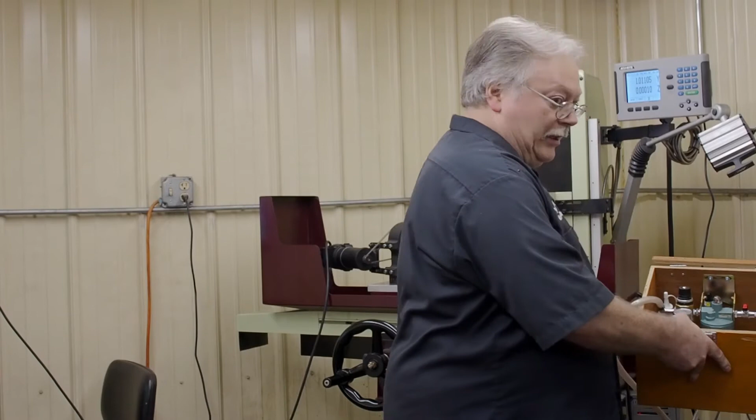The Planet 600, if you're interested in that, will come in a box like this, and in this box you're going to have an air filter, and you're going to have an oiler, and that oiler has to be a special unit because it needs to atomize the oil. If you're running straight oils like in a pencil grinder, the bearings won't work as efficiently. So if it's atomized, it works pretty nice. This is set between 20 and 30 drops of oil, but the way they got it set up, only a portion of that is going through there.

So if you bought the Planet 600 and you get the box, it'll come with an 1/8 inch collet and a 1/4 inch collet. It'll come with the regulators, all the tools you need. I believe there should be some stones, all the different things, the hoses. The nice thing is on their exhaust they got a little muffler system over here, so it's not that loud. I believe that will be close to $3,200 for everything.

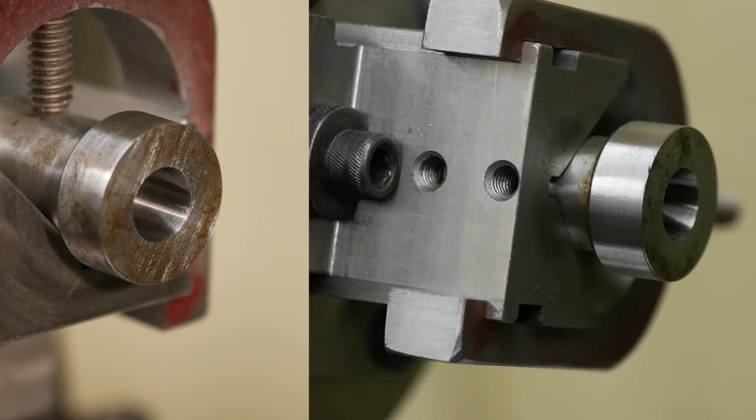And for what it can do, in my opinion, it's quite a bargain. And as you can see, what we have done over here, we did ID grinding. We did this OD grinding, and we're going to show some pictures of this. On the OD, because my wheel's quite a bit smaller than this, and it was very loaded up, I have a little bit of chatter on that, but you can work that out.

Other thing that's nice about this setup, if you really wanted to do it, and the way we have done it in the past as a business, we would get a lot of our work, we would set up and we would grind the OD on the surface grinder with our unit facing this way, and we just do the OD work with a big 8-inch wheel and get the best finish that we can.

And what we would do for anything that needed ID work, later on we would turn the unit, pull the guards off, set everything up, and then we'd re-indicate in the fixture off the face and then off the diameter and grind the ID concentric to the OD.

So we would save our ID work so that we would have, you know, maybe a day or two of work at a time on that, because it will take approximately, when you get good at it, 15 to 20 minutes to take the wheel and the guard off and get this unit up. And I got this set right now where you can indicate down on the bottom here and indicate across here, and it'll line up really well.

But it'll take about 15 to 20 minutes, so you don't want to do that if you have, say, a dozen of these. You're going to be adding 20 minutes to a part. So grind the ODs off first, flip it around, change it over to ID, re-indicate it up, and if you get good at that, you can indicate them in quite fast, and then you can grind the IDs. But it's a nice, easy way.

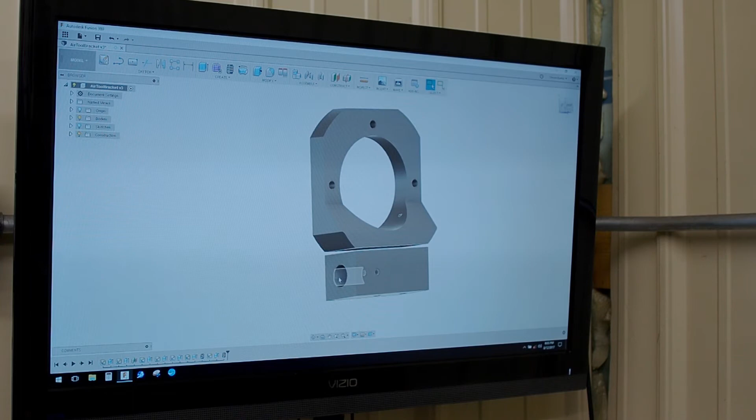But if you look at the hole that's over here, you can see what I got going on. I actually have 2 holes in here. What will happen a lot of times if you have just a round hole and you're taking a shaft, this is just slightly under 3/4 of an inch, about 2 or 3 tenths.

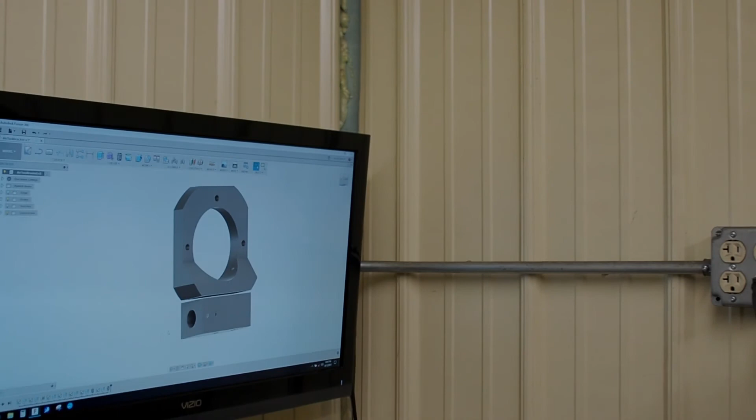Let's just say if your hole is .750 right on the money and that shaft is .750 on the money, you cannot put that .750 diameter into a .750 diameter hole. They're sized the same. So the shaft has to be a few ten-thousandths smaller in order to fit into that hole. And so what I did, I bored this hole out just as close as I could get it.

Now what will happen is if you have that hole even perfect, it's still a tenth or two small. What happens when you put a screw in over here and in the back and you tighten down, and if this was a perfectly round hole, you have 2 points of contact.

You have one point of contact on the tangency on the back side of where the screw is going to be pointing or putting pressure, and you're going to have where the screws actually put pressure on the front side. So you have two round circles, one is a few tenths smaller than another, you end up with two pressure points, and so what can happen, you're going to lose some rigidity in there.

And a lot of times if you're running a lathe with boring bars, you'll find that you'll get this. You think, why, this bar fits so good, I got it tightened down, but I get chatter. I can't stick my boring bar out, I can't get anything. A lot of it is because you got a 2-point contact and it's not holding this solid.

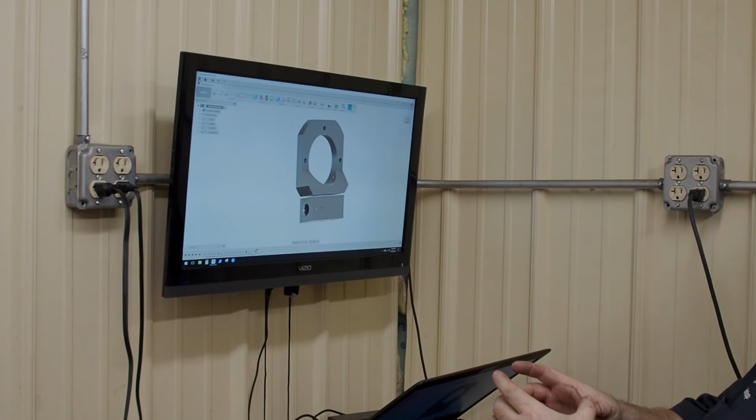So what you can do over here, once I bored this hole out, got it to the size I needed, I backed the boring head down 10 thousandths, and then I moved it over in that direction 7 thousandths, and so it's taken about 2 thousandths off, but you can see what it's doing. This is all clearance that's highlighted there. It's giving me a tangent line here and a tangent line here, so now I have a 3-point contact, and things are a whole lot more rigid.

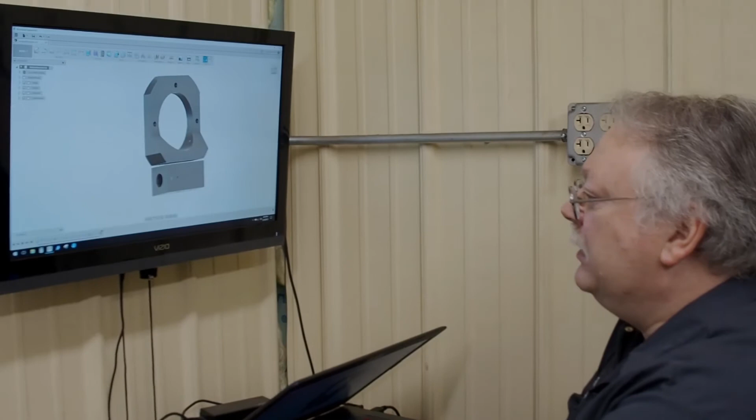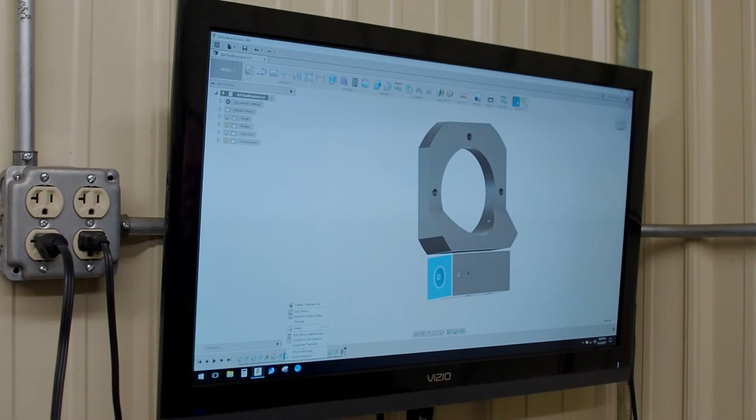And let me see if I can find a sketch on that, and I can show it to you a little bit more. Let's see, which one should I have these named off? Yeah, I think it might be that one. So here's what you can see. I went 750. Of course, I'm about 3/10 smaller than what I bored it to, but I just drew it out at 750. That's what this diameter right here is. This diameter is 750. This diameter right here, this little piece, is at 740.

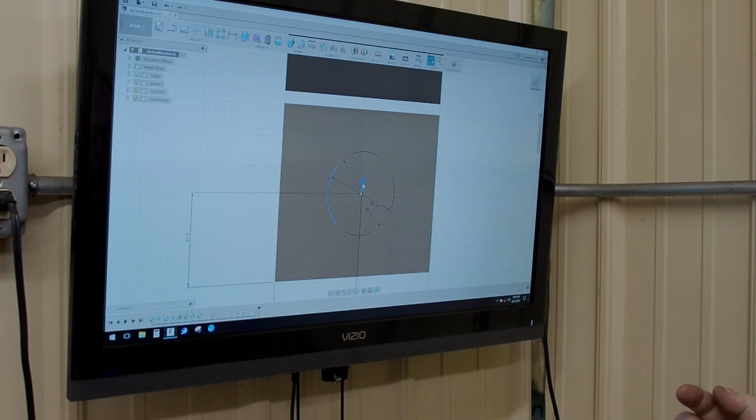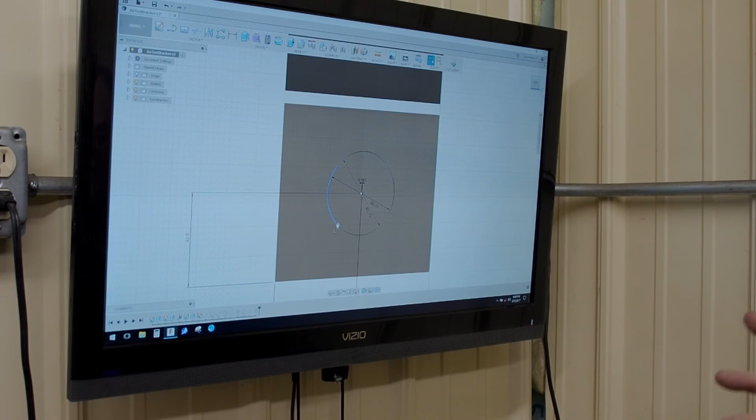So what happens is I backed the boring bar off 10 thousandths, and then I moved in that direction 7 thousandths. And so what it does is this is all clearance right now, all that you see in the blue. So now I got my screws pushing over here, and at that point, that's where the shaft is making contact. Now I got a nice rigid 3-point contact system. And if you do this with your boring bar holders and different tool holders where you have chatter problems, you'll be surprised at how much better that will work out for you.

So anyways, this is the project that we've been excited about, that we've been wanting to show for quite some time. I haven't seen anybody else use a system like this. Maybe they have, I just haven't seen it. I looked all over YouTube. About 20 years ago, we've done this at a different company that I was a part of. We used this for years, done excellent work. You wouldn't believe the high precision, accurate work that we've done.